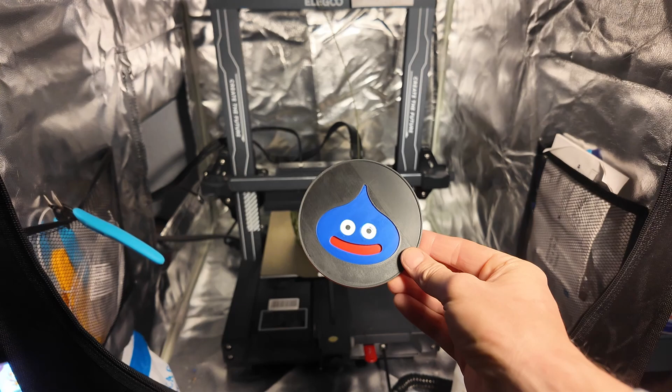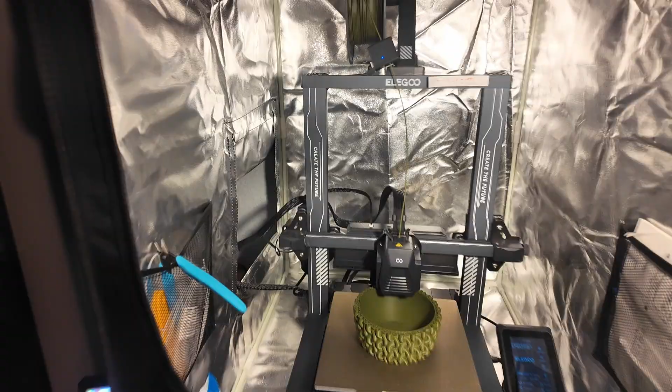How do you make something like this with multiple colors on a printer like this? I have one spool, one print head. It can print one color, but yet I was able to print a multicolor coaster with multiple colors printed throughout. How did I do this? I will tell you.

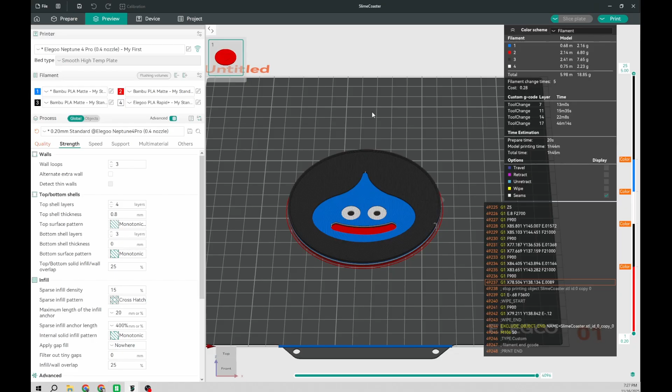Okay, so here's the final product in Orca Slicer, ready to go. Keep in mind, I'm doing this in Orca Slicer. I printed this on a Neptune 4 Pro, an Elegoo Neptune 4 Pro running the Klipper software. That's important because one of these pieces later on could be specific to anything running Klipper.

And Orca Slicer, of course, because this is what I know, so this is what I'm training in. So I'm going to go over to the other one we have here. This is just the STL file loaded up and ready to go. Keep in mind, STL files only contain geometric data. They don't contain any color information or any G-code related things. It's just geometric data, which means the stops or pauses are not included whenever I downloaded this G-code. So I had to learn how to put those pauses in there correctly to make it easy to manually change the filament, because that's the key — you have to manually change the filament.

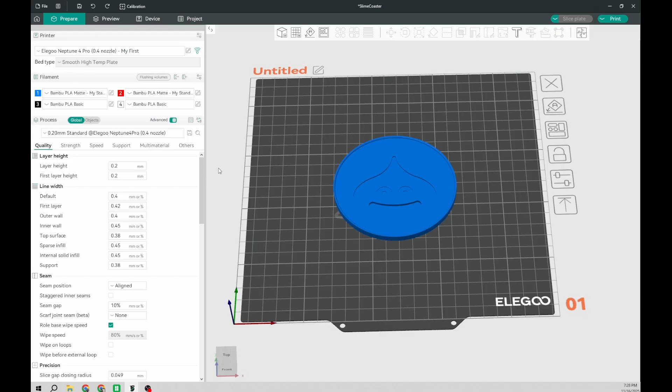So one of the first things you need to do is, over here on the left side, make sure you have all the colors you want selected. I have all four — four filaments here, and these are the different colors that I need. I know that because if you look at the finished product on Thingiverse, you'll see the colors you need to have available. It's important to do this because it makes it easier when you're printing and doing the filament change later. It allows you to see the individual color changes in the preview tab.

If you don't know how to add filaments, click on these plus and minus buttons up here to add and subtract different filaments. To change the color of the filament, click on the number, then click the color you want, click OK, and now you have the filaments available to you.

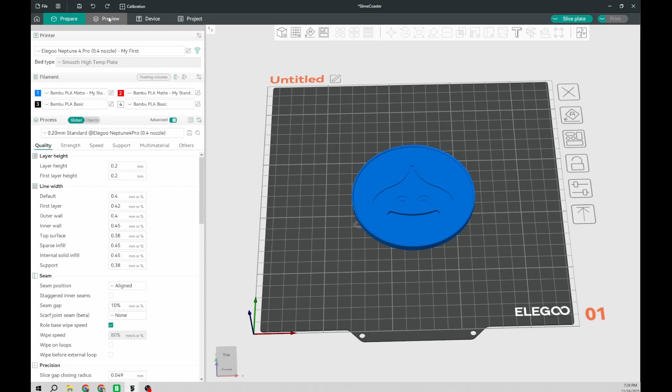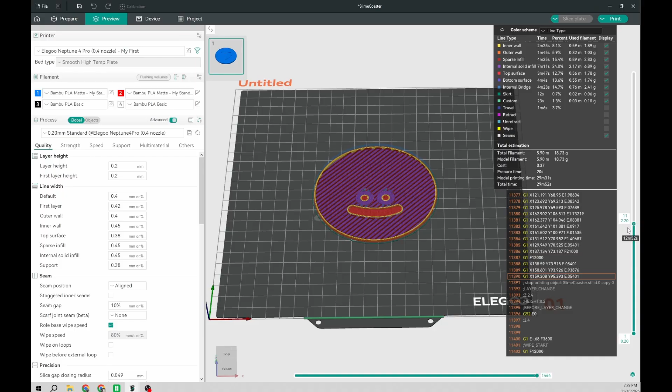So I'm going to go ahead and click over to the Preview tab and let it slice. Alright, a couple things on the Preview tab that I had to learn. This bar over here — I didn't know what it did when I started. I was brand new. But what this bar actually does is allow you to scroll through each individual layer that gets printed, layer by layer, to see what each layer looks like, and you can watch it. If you start at the bottom, you can watch it grow until a finished product is made.

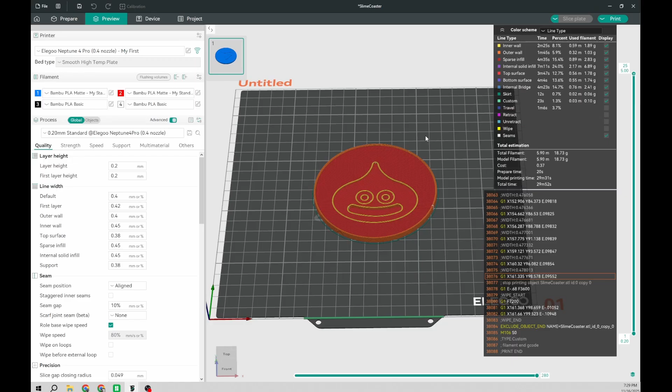So what these numbers mean: this 25 is the number of layers — that's the layer number you're currently on. The 5.0 is the height of the product, based on what you have selected for layer height. If I go down with the arrow key one by one, you can see it goes from 5.0 to 4.8, 4.6, 4.4 on the right side, because I have the layer height selected to 0.2. Of course, if you did 0.24, 0.16, or 0.12, it would change the math.

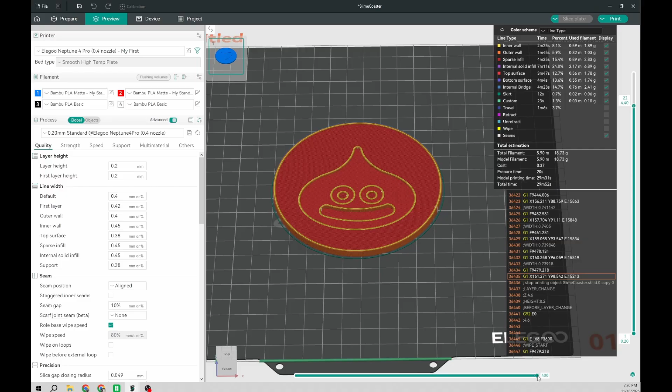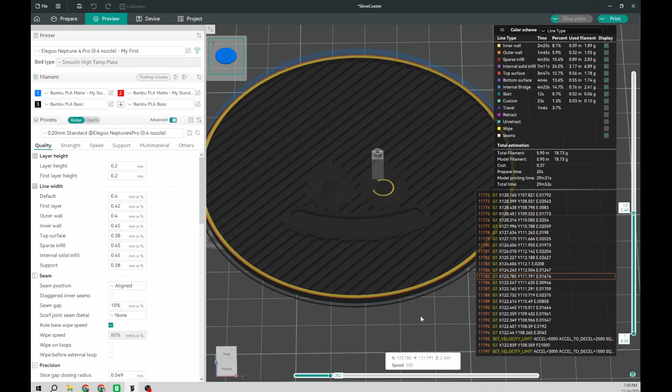Another thing that's kind of fun and neat — this bar down here shows the number of steps it does as it's printing. You can scroll it left and right, and it actually shows you each layer being printed. That one's not overly exciting, but let's go to one that has a lot going on. If I scroll this through using the right and left arrow keys, you can actually see it doing layer by layer printing. So right now we're printing layer 12, and this will show you everything happening when it's printing layer 12. Is this useful? I don't know, maybe. I think it's neat. I haven't found a specific use for it yet, but I do think it's a neat feature.

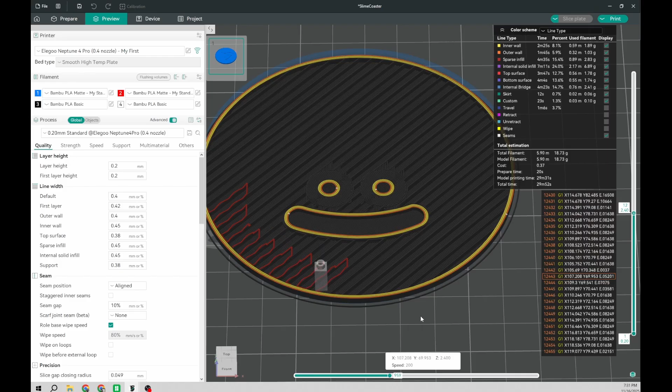Alright, so how do we determine where to stop, and how do we stop? If you right click over here on the plus sign where that layer is, you can right click and add pause. It'll pause when it gets done printing, and it pauses before the layer selected.

So we have layer 12 selected here, so it'll pause before it prints layer 12, not after it prints layer 12. So if we go down one, this is the layer it's going to print, and then it's going to start, and then pause before it prints layer 12. It'll finish layer 11, go up, and pause before starting layer 12.

That's how we figure out where we need to add the pauses based on the colors we need visible. You put the pause on the layer where you want the color change to happen. So it's kind of intuitive, right? I want blue to start printing on layer 12, so I'm going to put a pause on layer 12 so I can swap it out, and then blue will start printing.

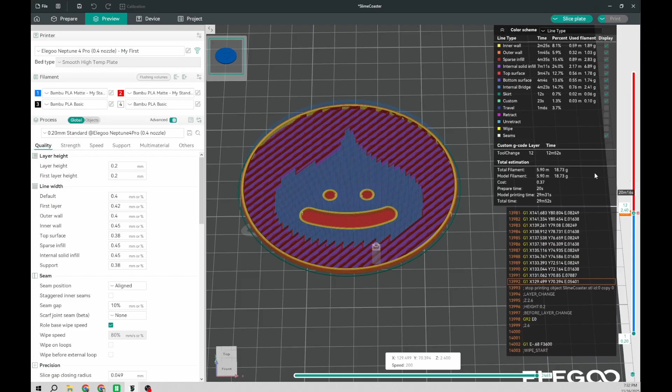But there's another thing that makes it easier. You can right click and change filament. Look at this, you can see those four different colors we added previously. So if I change filament to red, the bar actually changes. The bottom half of the bar is blue, the top half is red. You do have to reslice every time you change colors.

Now if we go down one layer to 11, everything from 1 to 11 is going to print in blue. But when we get to layer 12, it's putting a pause in there. There's a trick to that with Klipper software. It's going to put a pause in there so it stops printing.

And then your job is to go there, manually change out the filament, load the new filament, and resume printing. Then it'll start printing the next color. So you can kind of get an idea of how that works, right?

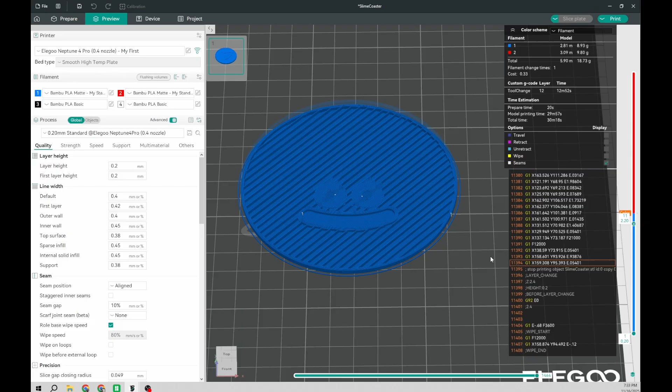Now you got to figure out where to put your pauses to achieve the colors you want. The only real way to do that—I'm going to remove this here—is you have to step through one by one until you see the things appear, and then figure out where your pause has to be.

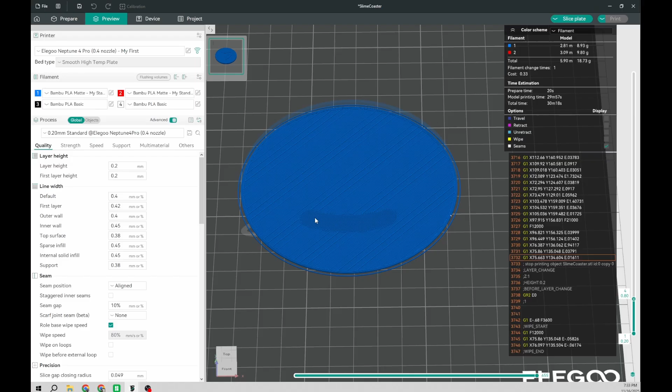So if I step through here, this is going up. Okay, now we have the mouth starting to form. You can see right here the mouth is starting to form. If I go up, the mouth is still there. We've got a little outline on the mouth, and now we have the eyes starting to form. So now the eyes are starting to form.

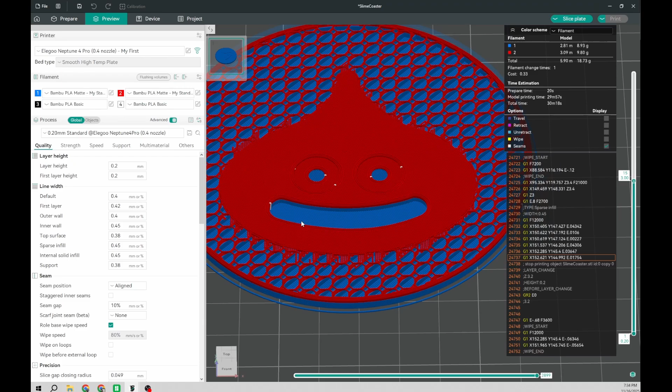That's okay, but if we keep going up, pay attention to the mouth. Notice how the mouth never has anything else printing on it after about layer 6. Actually, layer 5 is probably the last layer that prints anything on the mouth. Layer 6 wraps around the mouth and starts with some infill, so we could probably put that at layer 6.

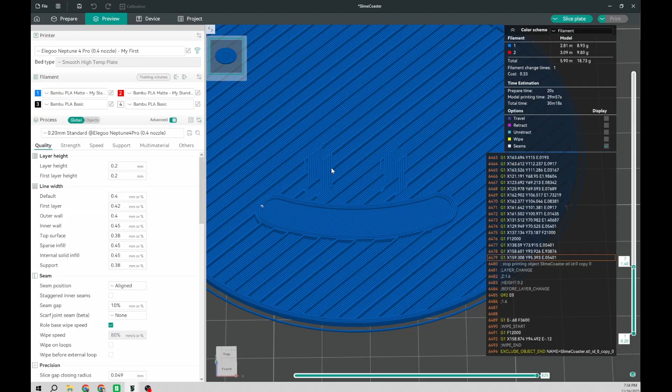And then on layer 7, we're going to start growing in the eyes. We want the eyes to be black to make sure we capture the black of the pupils, right? So again, I'll show you the finished product.

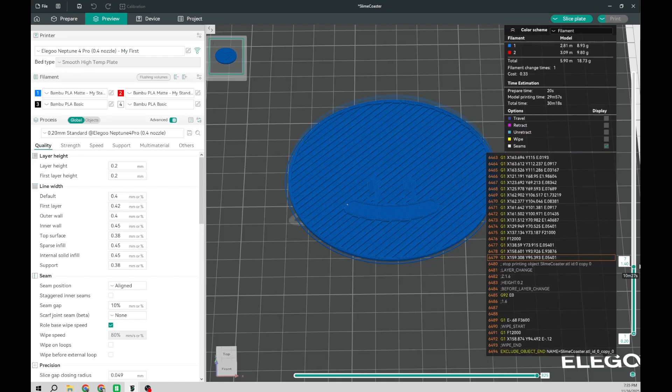You can actually see on this the different layer changes. I have red as the start, so we need red to be the base color because the mouth needs to be red. Now, you can't do a color change on the very first layer. What you have to do is go back to preview and change the whole thing to red. Right click on the object, change filament, and change it to red.

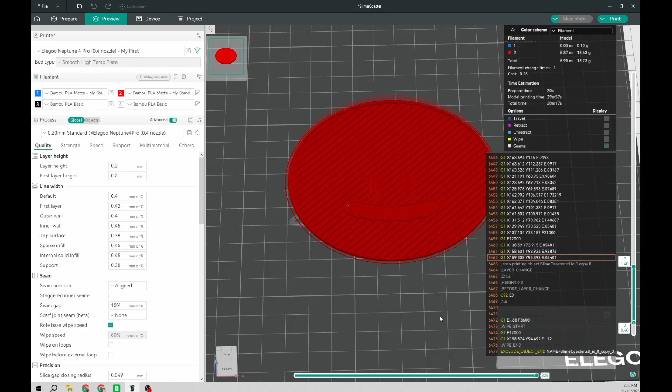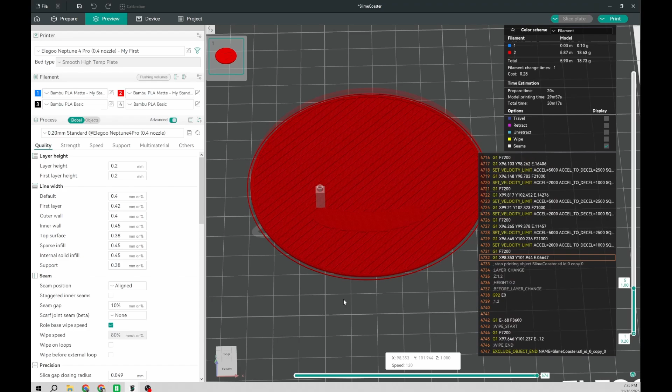Now we're going to go back to slice. I said we're going to do layer 7 for the first layer change, I believe, right? Okay, so we're going to do layer 7 for the first layer change.

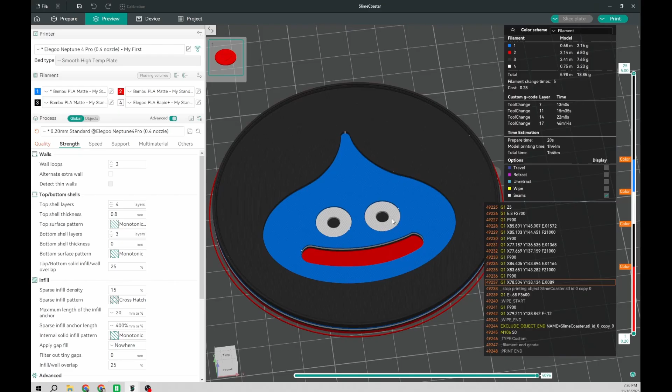I'm going to right click, change filament, and what color do we need this to be? We need this to be black, for the eyes to start appearing. Because if we scroll up a bit, we can see the pupils are starting to form. So we need black for the pupils. You can see right here the pupils are forming, so we're going to do black.

We're just going to go up and slice again. Every time you add a filament change, you want to slice again. So now we can see the black of the pupils is starting to come in. Now what's the next color? It looks like the eyes are forming, so we probably need to do something for the eyes, but what layer do we need to do it on?

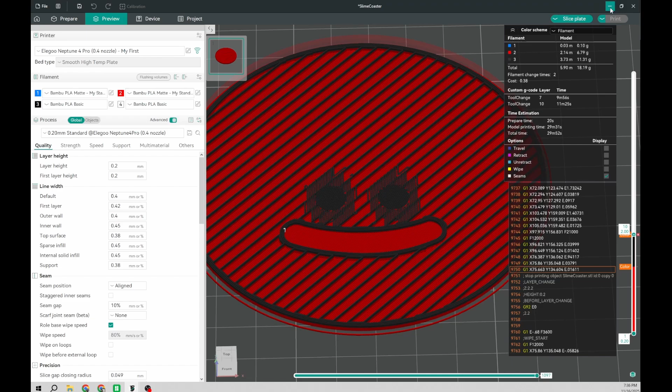Let's try it on this layer just to see what happens. Slice again. Oh, look at that - we actually covered up the pupils, didn't we? Now the pupils are going to be white as we scroll up. We can't have that. That's why it's so important to have your colors set up here.

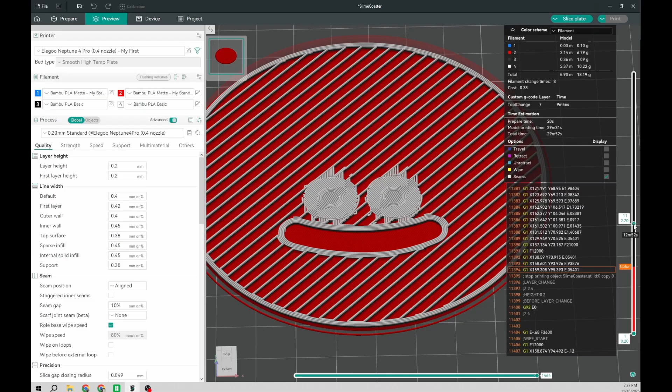So we're going to remove this one. We're going to go up, maybe here, because this looks like we have the white starting to form. So let's change this to white right here on layer 11. Slice plate. And now, okay, now we have the whites of the eyes.

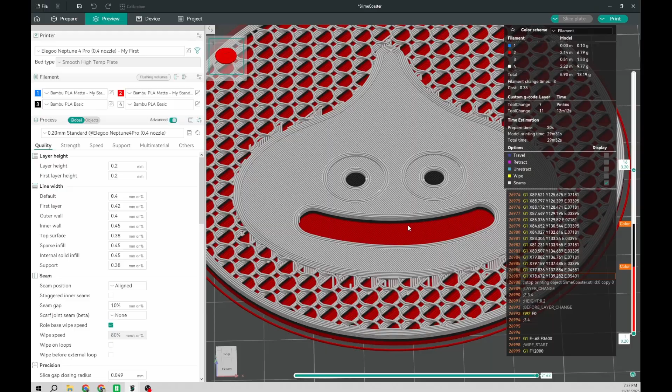Now the whites of the eyes are going to be here. We need to make sure the whites of the eyes do not get covered up by the next color, which is going to be blue. So it looks like maybe here - this is the last, it looks like if I do it here it's going to be too soon. I'm going to do it on this one, number 14. We're going to change that to blue and slice this again.

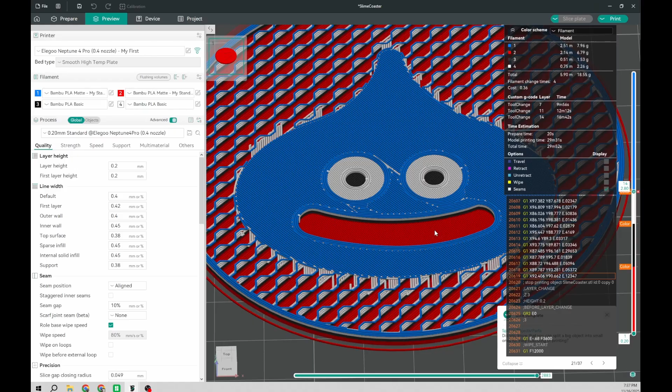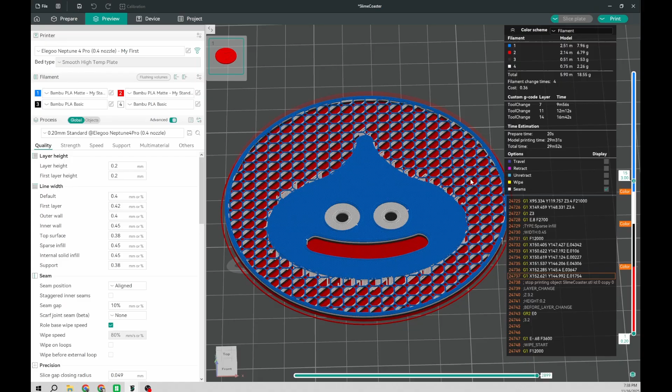That's looking nice, we got the blue filling in. We still have the red of the mouth, the black of the pupils, and the whites of the eyes. This is looking nice. We have one more color to fill in because we need all of that black, since everything outside of the blue slime is black. So we need all the black to fill in.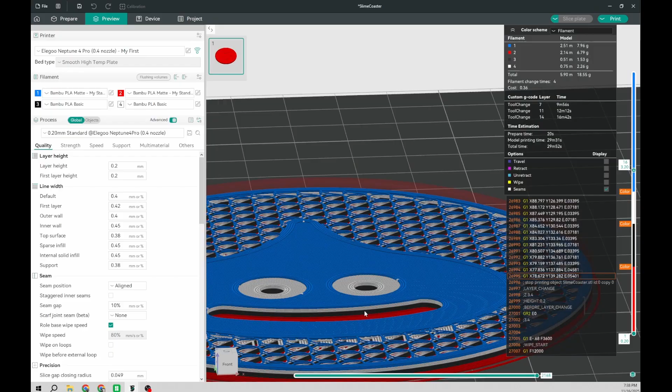We have a lot of leeway here for doing that. It looks like right here might be the last layer for the blue. Sometimes you can look at the edges of where it's printing, like right here, because we can see this is starting to stack on top and the blue is no longer being printed. So I'm going to change the black here on 16. We don't need a whole lot of blue, it appears. Let's slice plate.

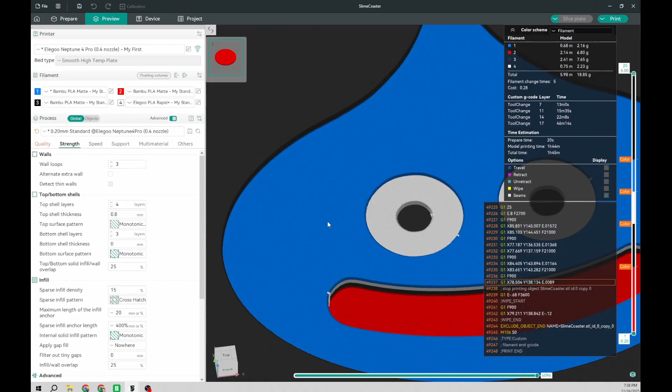Alright, now we got a nice black outline here for the slime. Does that match my other one? It looks like on my other one, I must have changed black at a different time, because I don't have that black outline here. You see that? This black outline here does not exist on this one here. Does that matter? Probably, I don't know - probably not.

What layer did I change? I did layer 17 on this one, and this one I did layer 16.

Would it have mattered? Not really, because you still have the blue of the slime and the black outline around it. It still would have been a good looking print.

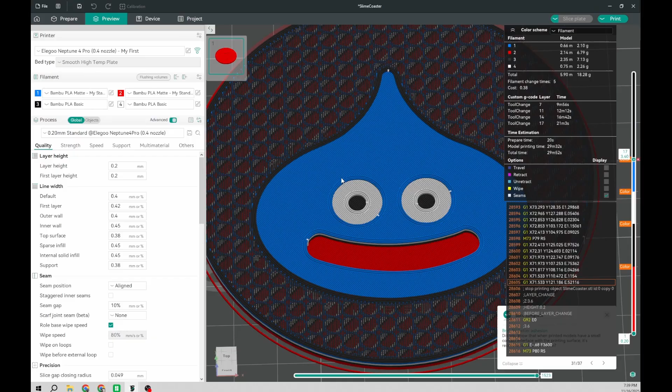So let's go ahead and fill this up. There we go, I'm going with it. Alright, so that gives you an idea of how you can do this.

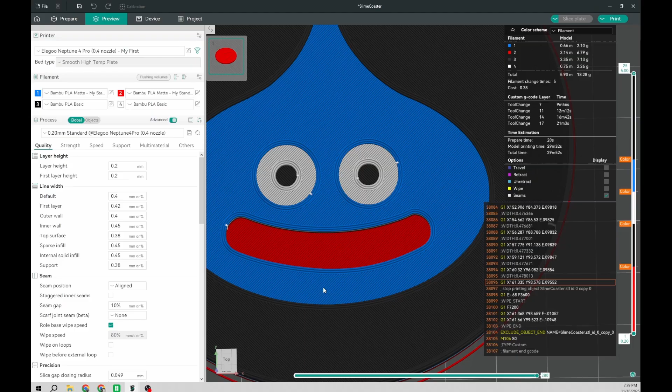Using Orca Slicer, keep in mind there's probably not a whole lot of ways you can use this. It's very specific—you have to have ways for the colors to bleed through and show through, which means you have to have holes present. The reason this works is because there's nothing else that prints over the mouth, right? There's nothing else that prints over the pupils once you get the black layer, the white layer, and the blue layer in. It all layers on top, and then it skips printing once it's done with that. So this can be done, but I imagine the application of it is small. It's a very specific type of application.

Now, could you do it for anything you wanted? Say you were printing something tall and you wanted it to be different colors for whatever reason—could you do this? Absolutely. You could do that and change colors. By all means, it's your thing.

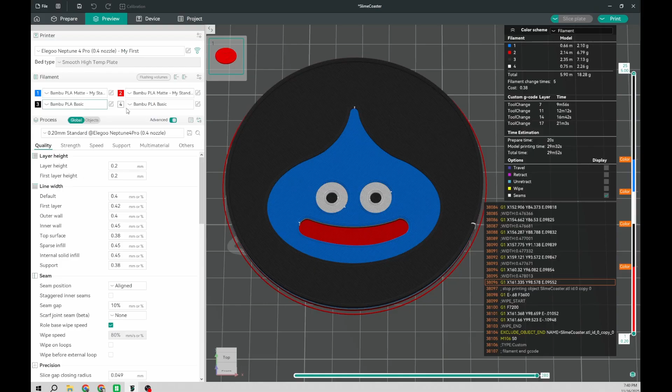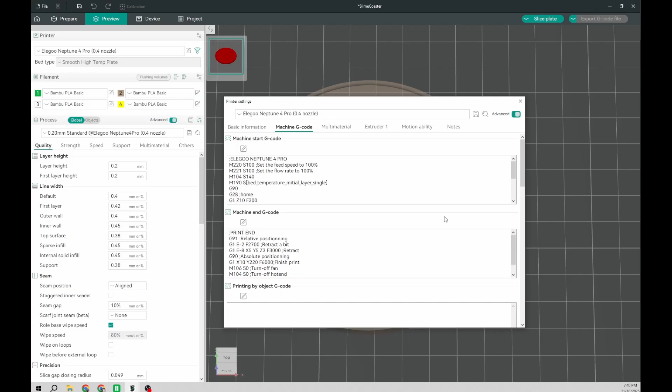Now there's another thing that needs to be covered with Klipper software. Whenever you do the change filament over here, Orca Slicer with Klipper software does not automatically put a pause. If I change this to the system preset of the Neptune 4 Pro and go to the settings, I'm going to go to the machine G-code. There's a change filament section in here. So by default we have M600, but M600 is not the change filament code for Klipper software.

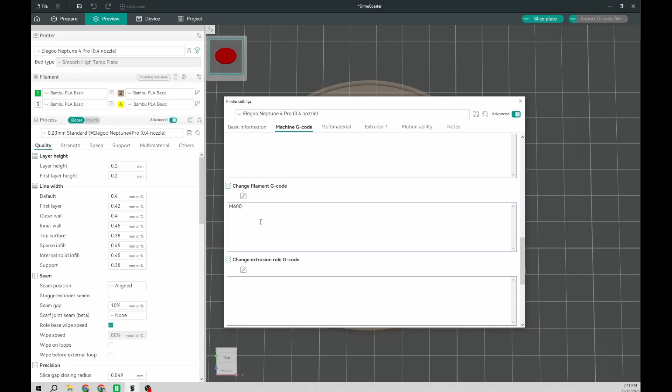I fought with this until I figured out that it just does not work. I had to do research and figure out what to put in here correctly, because I wanted to do the change filament so I can see it in Orca Slicer when I'm doing the preview, but I also wanted it to eject some of the filament to make it easier to change. But when I was doing the change filament, it would not pause at all. I did it multiple times, couldn't figure out why it wasn't pausing, until eventually I just started asking Gemini and got the answer.

So I'm going to change it to mine because this one already has it built in there. So there you go—change filament G-code. M600 does nothing to Klipper, I guess, I don't know what M600 does. But the word 'pause' will pause the print. Simple enough, right? Who would have thought?

Pause the print, and then M702 semicolon eject filament will actually eject some of the filament while it's still hot, to make it easier to pull out, lessening your chances of something getting stuck, caught, or jammed. If you've ever dealt with a clogged nozzle, you don't want to deal with a clogged nozzle. If you haven't dealt with one, it will happen. It's like riding a motorcycle—you have either crashed or you will crash. You will either have a clogged nozzle or you've already experienced it. That's the world of 3D printing.

So, M702 semicolon eject filament—put that in there, put pause in there, in this order, and it will pause the printer, eject the filament, allowing you to change out the color easily.